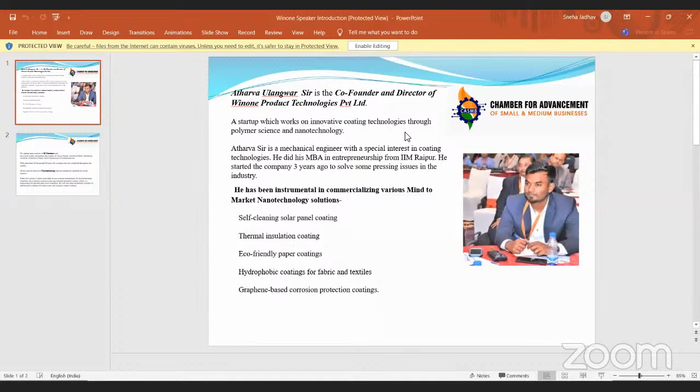Thank you, ma'am. Now I would like to introduce today's speaker, Mr. Atharva sir, who is the co-founder and director of Winone Product Technologies Private Limited, a startup which works on innovative coating technologies through polymer science and nanotechnology. Sir is a mechanical engineer with a special interest in coating technology. He did his MBA in entrepreneurship from IIM Raipur.

He started the company 3 years ago. He has been instrumental in commercializing various mind-to-market nanotechnology solutions like self-cleaning solar panel coating, thermal insulation coating, eco-friendly paper coatings, hydrophobic coatings for fabric and textiles, and graphene-based corrosion protection coatings.

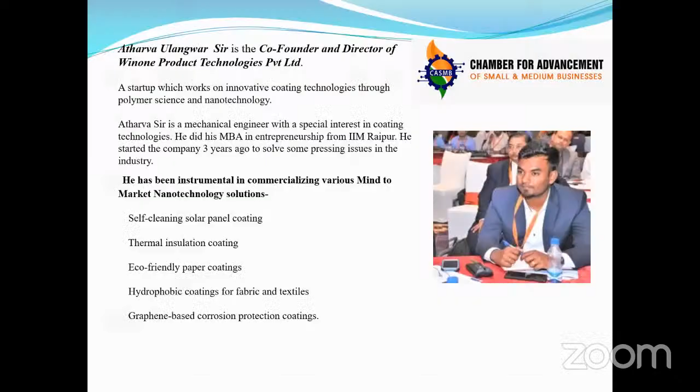His startup team consists of 35 members and have done projects throughout the country in power plants, chemical plants, refineries, fertilizer and irrigation projects, and commercial civil industries. With more than 50 successful projects, his company has set a foothold throughout the country.

He has a special interest in nanotechnology and its commercial applications in industry. Today he is going to shed some light on new coating technologies for the food processing industry. He will discuss a new age thermal insulation coating, which is a replacement for age-old glass wool insulation, and share technology insights on antibacterial coatings for clean rooms and hygiene control coatings.

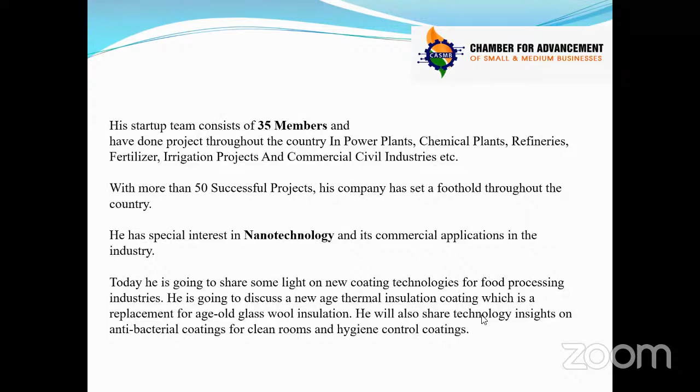Thank you, yeah, thank you, Hemlata, for the kind introduction. Hello everyone, a very good afternoon to everyone, and thank you all for joining today. So let me start with the presentation right away. I hope you're able to see the screen.

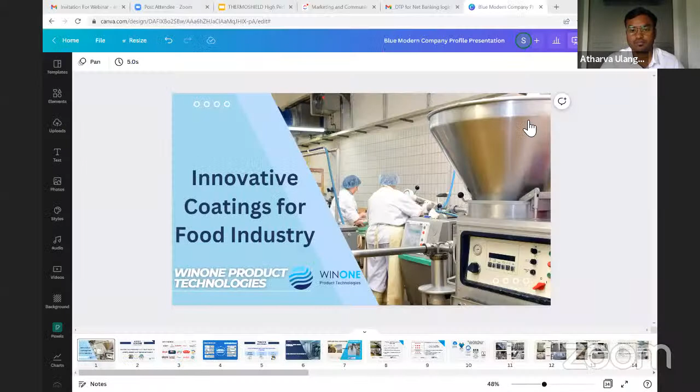So today we are going to speak about innovative coatings for the food industry. I believe all of us in a way are related to the food industry, as consumers or manufacturers or in some other way. I'm going to talk about innovative coatings for the food industry, their applications, and how these coatings help the manufacturing industry operate in a better way.

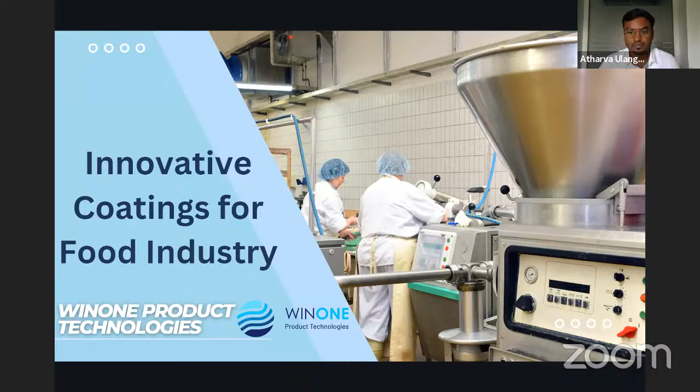Moving forward, just about my company - we are a startup based out of Pune, and we have been working for the last 3.5 years. We work only on coating technologies which help you save assets, energy, and environment. Assets, energy, and environment, that's our core offerings. Assets means we protect infrastructure like power plants, chemical plants, and everything. Then we work on energy - our coatings help save a lot of energy, which I'll talk about. And in general, there is an impact on the environment.

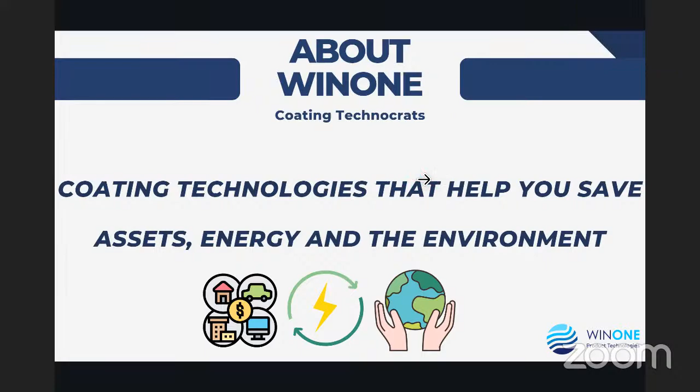We mainly work in irrigation, oil and gas, marine, pharmaceuticals, and all of that. This is what I've tried to highlight across new and old plants.

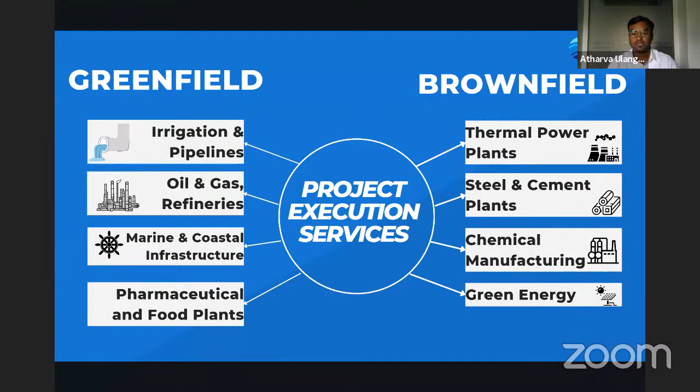Coming to today's webinar, I'm going to highlight two specific coating technologies - one for thermal insulation, and second for hygiene control through antibacterial or antimicrobial nanotechnology. Today's webinar will highlight how coatings can help you save and improve energy efficiency, hygiene control, and asset integrity. Energy efficiency and hygiene control are two very separate topics, so I will go through them one by one, but they are related through coating technologies.

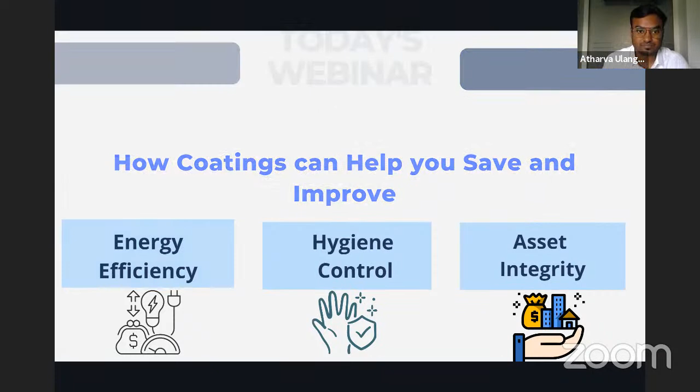First, starting with thermal insulation coatings. Wherever we see process industry throughout the country or the world, there is heating or cooling - either a process takes place by heating something, making steam, evaporating, or boiling something, or it is done by cooling or refrigerating something. When heat is moved to a point higher than ambient temperature, this heat has to be preserved, or this chilling has to be preserved. That's why insulation is used in most of these industries.

But there are a few conventional technologies in the market, and there are some drawbacks with that, which we'll look at. Conventional insulation consists of glass wool, rock wool, some kind of PUF insulation, covered with aluminum cladding. That has a lot of problems, though it's also actually a very good system - it's been used for so many years and is applicable in all industries, from refinery and power plants to food processing and pharma. But this system has a lot of inherent problems, which we'll discuss.

So what we're doing is converting this conventional insulation technology to a new technology through coatings. This whole system of PUF - the glass wool, rock wool PUF, and aluminum cladding - is being replaced just by the coating.

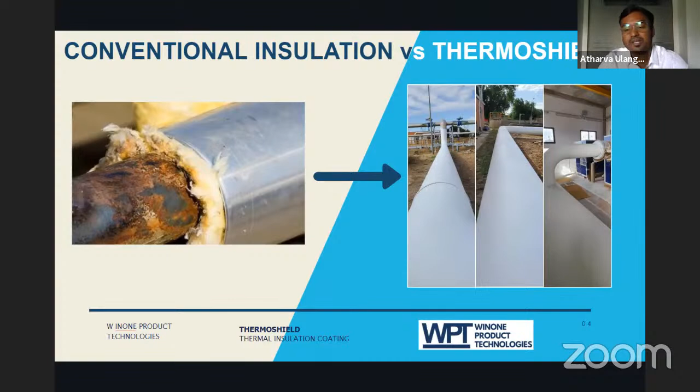So these are the problems with conventional insulation. The most major problem right now is corrosion under insulation. For example, if your pipeline is insulated and covered with aluminum cladding, you do not know what is happening under the insulation - corrosion must have eaten into the pipeline, leakage must be starting. As soon as liquid or process steam starts dropping from your cladding, that's when you know there is some damage below the insulation.

Corrosion under insulation is a very big problem in the country right now. I was reading a research paper where they estimated around 800 crores worth of loss to just the oil and gas industry because of corrosion under insulation.

The material used for insulation is also non-recyclable. If you accidentally touch it, it will start itching, or the small fibers will penetrate into your skin. Now imagine how the workers might be going through while installing this insulation.

This has been happening for many years. Also, this insulation is very difficult to install on complex structures, and because of this complexity, in a lot of places the insulation does not happen—like on valves, bends, and precious equipment like control valves. So these kinds of things are left open, and these are the points from where the heat loss happens.

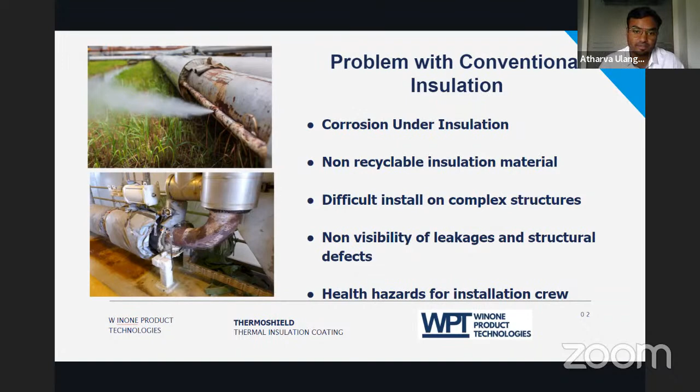We have developed a coating technology which is applied like a paint, but it acts like an insulation. We have integrated nanoparticles which act like an insulator on the nanoscale, dispersed into polymer to make a coating. So 60 mm glass wool can be replaced just by 3 mm of paint. Isn't that a very big revolution?

But it also has a lot of other advantages. If I apply a 2 mm coating, from 120 degrees we can bring down the surface temperature to 45 to 50 degrees. Also, if applied like paint, it also acts like an anti-corrosion paint. So the problem of corrosion under insulation is completely gone.

You can completely see the surface of the pipeline by visible eyes. You do not need to wait until the pipeline punctures. On top of all this, it is a water-based coating, meaning it's non-harming, does not have any solvent, and the best part is it's skin friendly.

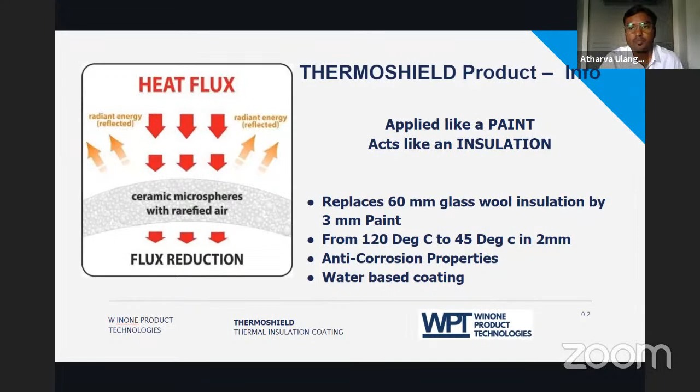So we are replacing something very conventional which was there in the market—glass wool, rock wool, or PUF or PU panel—with our coating.

So a few of the technology features, like I told you, it's water based with nanoparticles and completely free of any hazardous chemicals. And it works in two ways.

It works on the heat side also, it works on the cold side also. It will not let the heat escape the hot surface, and if there is cold inside, it will not let the cold escape the cold surface. So it's an insulation on both sides.

Since it is applied like a paint, the application speed is also very high. It can be applied with a brush or a spray gun.

Basically anyone can use it in-house. For example, if we just give the bucket, any painter can apply it. Actually, our application teams are also trained painters. So it's so easy to apply.

We work on polymer technology, so it has a life of 3 years in exposed environment, but if we apply a good amount of top coats on that, we can extend that life up to 10 years.

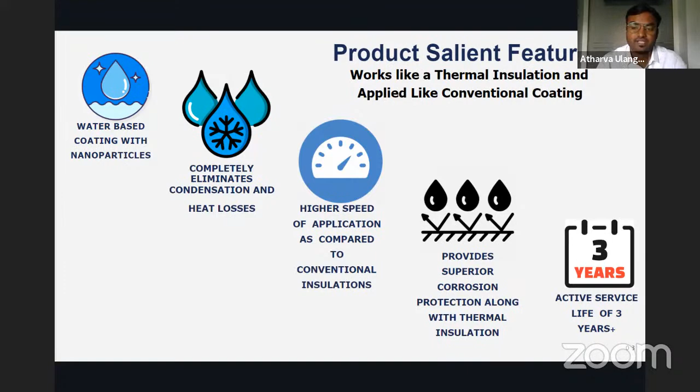I'm showing you some examples where we have applied this technology, mostly in pipelines. On my right side, this is a very complex network of valves and buffer vessels, with pipelines and small indicators, so it was very difficult for conventional insulation to happen here.

So this is where we applied our coating. In the bottom part, these are chiller pipelines—HVAC systems—and you can see the pipelines are placed so close to each other that it was impossible for conventional insulation to take place. This was actually a design error, but then to solve this problem, this coating came to help.

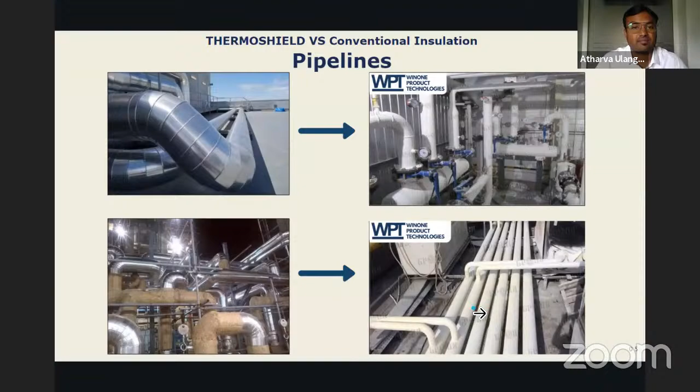This was a hot application, this was a cold application. These are some pictures of the pipeline application.

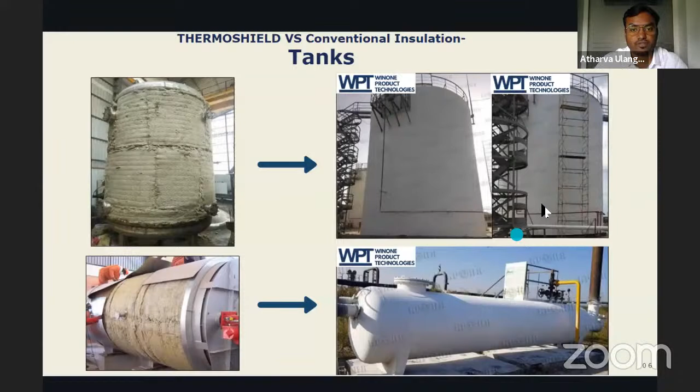We have also applied this on AC and HVAC ducts, where there was a limitation to the application of PUF panels or PU foam. This is also a very good application, and this coating can be sprayed at a very faster rate. So there's no need to wait for the ducts to get installed before applying it. These ducts can be coated on the ground and then installed.

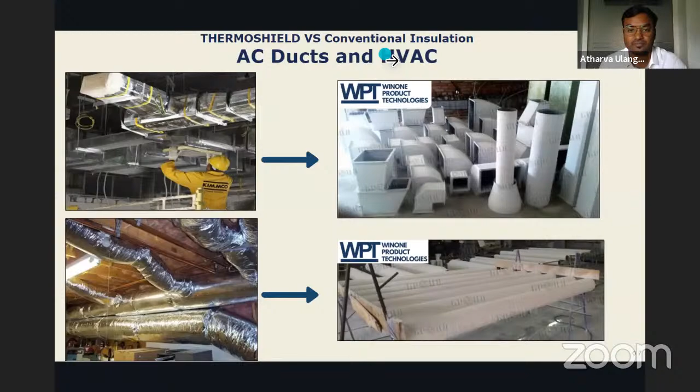With thermoshield, when we talk about the food industry, there is heating as well as cooling in the processes. In the dairy industry, there is a lot of cooling as well as heating in the same facility. In other kinds of food processing, mostly steam is involved. So it has applications in steam pipes, hot and cold water supply lines, ducting for ACs, and you can also insulate steel structures, roofs, internal walls and windows with this. That's a very good application. You can also insulate tanks and trailers like we talked about. It has a working range from 10 degrees to 120 degrees, so up to 120 degrees we can insulate and bring it down to ambient.

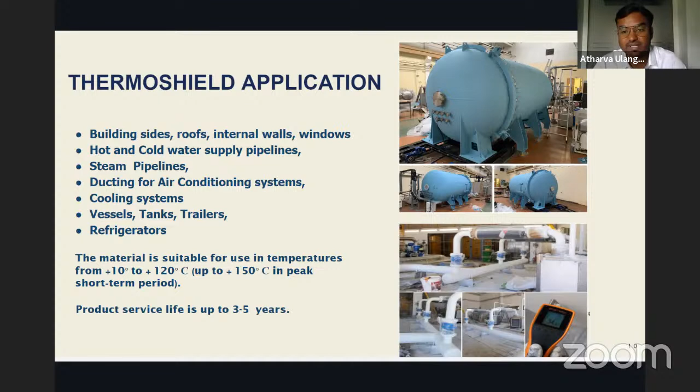I'm just showing you some case studies now. These are a few case studies from a mix of oil and gas, manufacturing, food, and power plants.

These are some vessels which we did for Finolex Industries, and you can see we got the 80 degree temperature down to 35 degrees. That's a 45 degree delta T with just 2 mm thickness. You see this is open to atmosphere, and if you notice, it would have been impossible to do conventional insulation with a vessel like this. If conventional insulation were to be done, these areas, like where my pointer is, would never be covered, as well as with these tanks.

We did multiple tanks there where conventional insulation was not possible. That's why for years these tanks were left open. With this insulation, now they can save almost 45 degrees of heat retained inside the vessels.

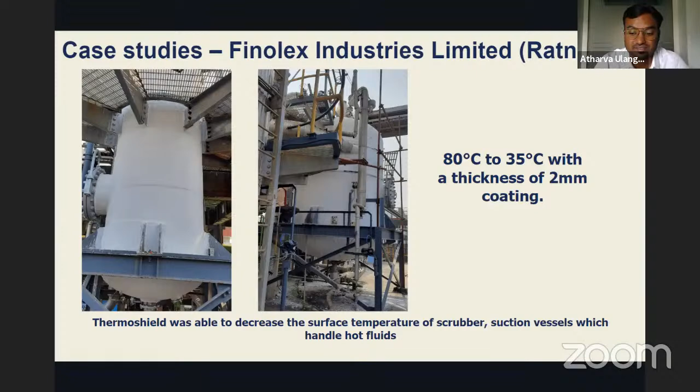This is a case study from Dynamix Dairy. This is a chilling plant - sorry, this is a hot application. This is a vessel which carries steam. Again, this insulation had gone to waste because of water ingress, and there was corrosion on the tanks. So we replaced that with an insulation coating, and this was done immediately within 1.5 days. They had a visit, so there was a very quick turnaround which we could achieve with this application - an 80 to 40 degree difference with a dry coat thickness of 2.5 mm. For the same application, they would have used a 60 to 70 mm thickness glass wool insulation with cladding and all the fittings.

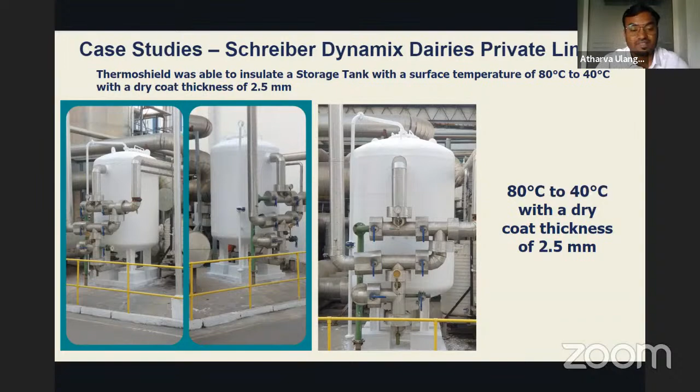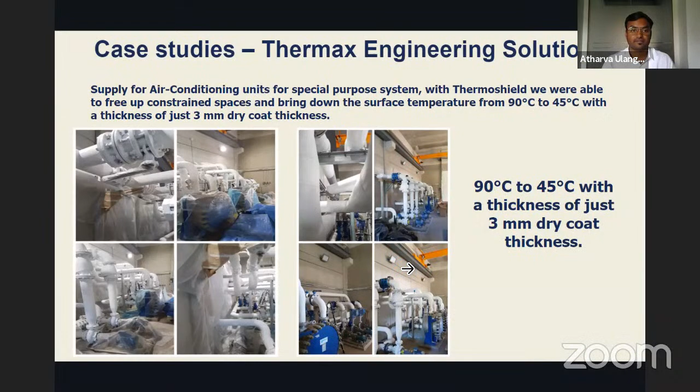A few case studies with Thermax Engineering - these are some of their field installations where an air conditioning unit and a heating unit were in combination. 90 degrees to 45 degrees, again a 45 degree difference, with a dry coat thickness of 3 mm. If you see the structure of these pipelines, it was impossible to do conventional insulation. The valves or bends would have been left open because proper workmanship never happens in a conventional insulation system. So this is a very good example where complex systems can be replaced in this way. This is again one application.

This is one very good application where we have the freedom to add any color in the coating, so the coating can be colored in any form. And if you see, this is done with a very good surface finish.

This was actually a reboiler, and it was exported to outside countries. So this was actually installed in the factory.

If this was conventional insulation, the tank would be sent there, then the insulation team would be sent separately, and the insulation material sent separately in a container. This team would go there, install on site, and come back to India. Instead of that, we have just coated this in the factory, and it will go as a ready-made piece to the end customer.

So this is the beauty of this product and how much cost and value it has saved for a lot of application.

So yes, before moving ahead, this was something on thermal insulation coating. We are continuously on the research where we are trying to reduce the thickness day by day, while maintaining the same temperature difference with the coating thickness. If you have any questions, we'll take it at the end because I have one more part to cover.

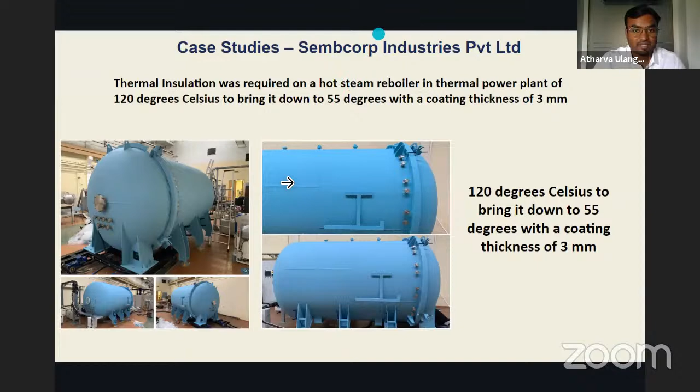So this is a technology which we are working on since last 3 years, and we have got very good response. Whatever application is there, we can develop it because we have our own research and development team.

So my aim with this technology is to eliminate glass wool and rock wool in the market, because there are a lot of drawbacks to that. It cannot be disposed of. The people who install it are having cancer problems, and there are a lot of other related issues to that. So this is a very good water-based solution which can replace that age-old technology.

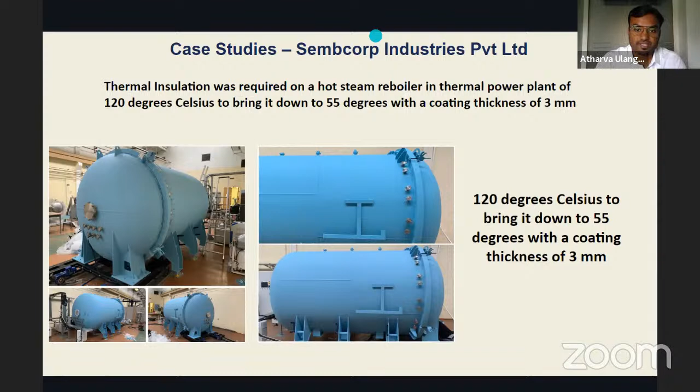So yes, moving forward, the second part of the webinar which I wanted to cover was antimicrobial coatings for hygiene control.

Friends, we realized the importance of hygiene control when COVID hit us. You were not able to touch any surfaces, or after touching or going out, you could come back and wash your hands. Then you started using sanitizers on a daily basis. Then mask was a very mandatory thing.

So why this came into picture after COVID, but this scenario was already present. These things were already happening in the food industry or the hospital industry, where sanitation or surface cleanliness is of very, very high importance. So what happened during COVID is we started working on these technologies, and what was developed during COVID got applied to other industries as well. So what we developed for common public was also available for the industries to adopt.

So let's get into this. What is antimicrobial technology? When we say antimicrobial, the basic and most common examples of antimicrobial technology is your Dettol, or the soap which you use, or the sanitizers which you use. So they are all antibacterial, or the Lysol also which you use.

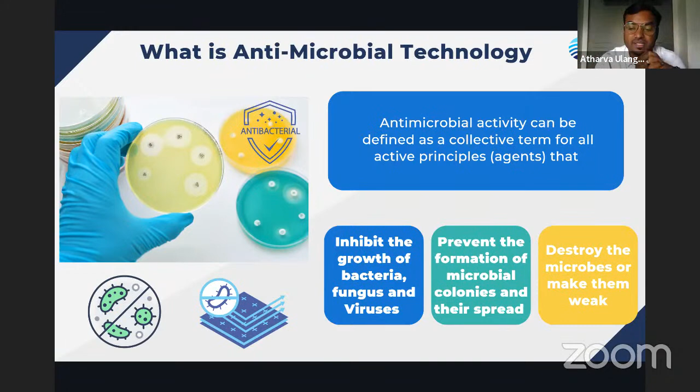So I'm just showing you a video of how antibacterial technology works. What we have done is we have worked on a lot of nanoparticles which go into these coatings, and they act at a nanoscale. Nano means 10⁻⁹, so if you divide 1 meter by 100 crore, you will get 1 nanometer. So we started working on particles which are in the 5 to 10 nanometer size range.

And what we did, we included that in the coatings or polymers, and it did miracles. So you can say we developed coatings which can destroy virus, bacteria, as well as fungus from the surface permanently. Now how this works, we have demonstrated in a very simple graphical video. Please pay attention and see how it works. Maybe I'll also explain something in the middle.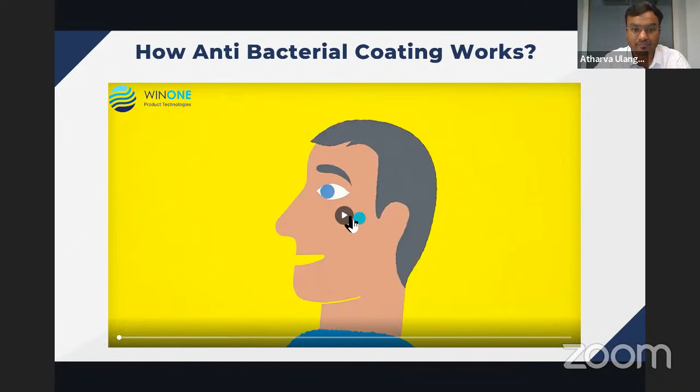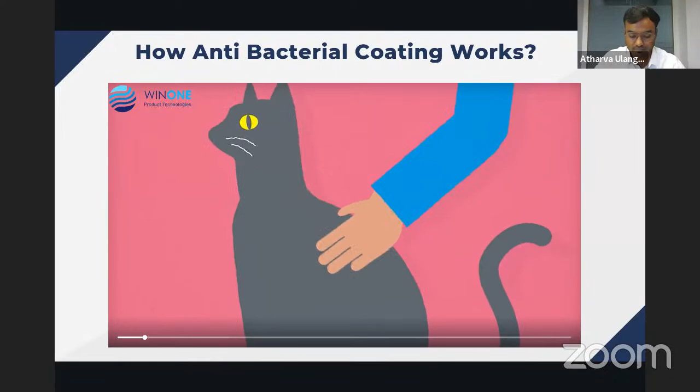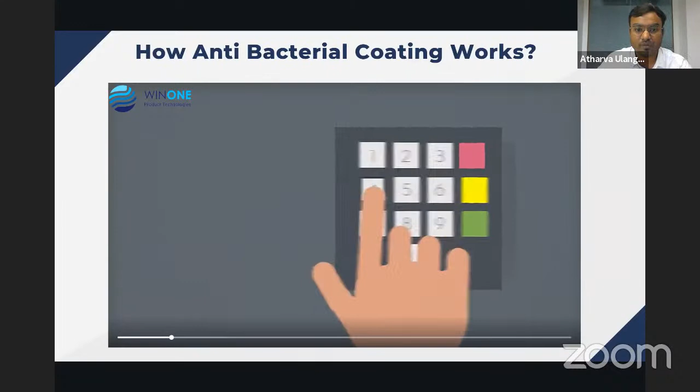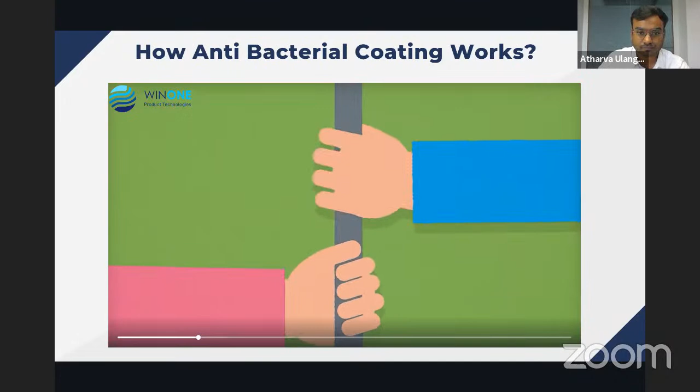You see, like this person is touching everywhere. He sneezed first, that's where the bacteria is in his hands. Now he's touching it everywhere - from the lips to the pets to the mobiles, then your chair, your carts, everywhere. So all the common touch areas, this person is touching it everywhere. So this is the bacteria or the fungus or the virus, it can be anything.

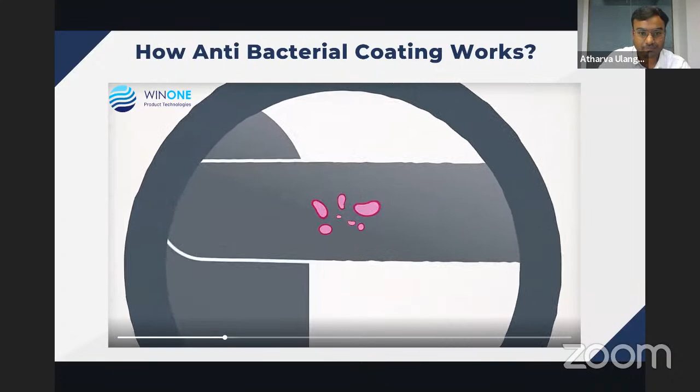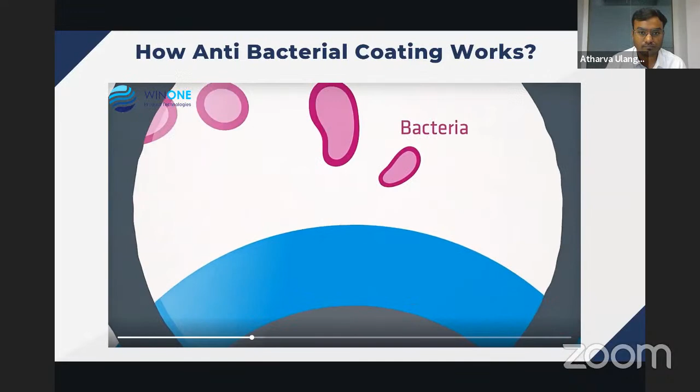So this is the bacteria. Now what happens when this bacteria comes into contact with the nano coating? So here Ag means silver. We developed the coating based on silver and a lot of other technologies.

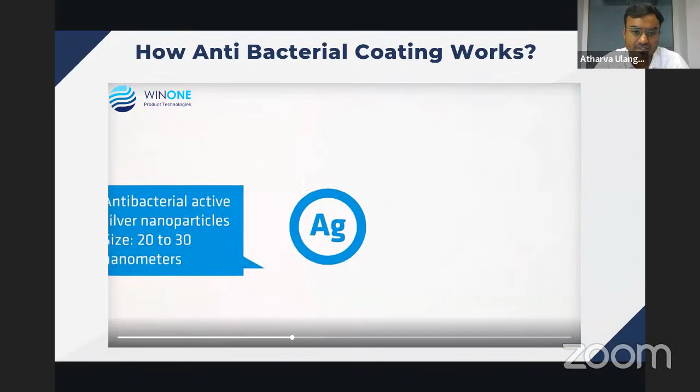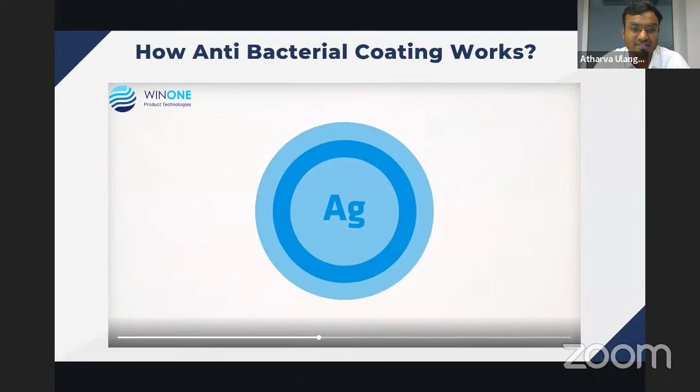So silver is antibacterial in property. Like you must have seen, in childhood we used to have chandi ke chamche se khana khate. So that was because of this, because inherently silver has antibacterial properties.

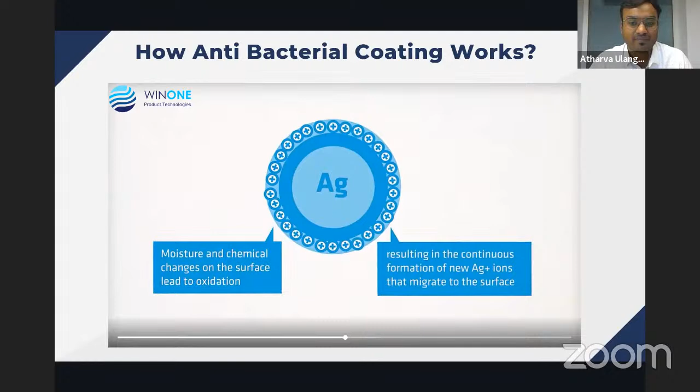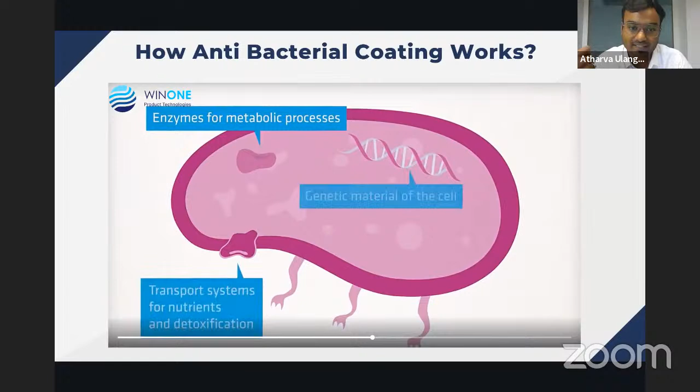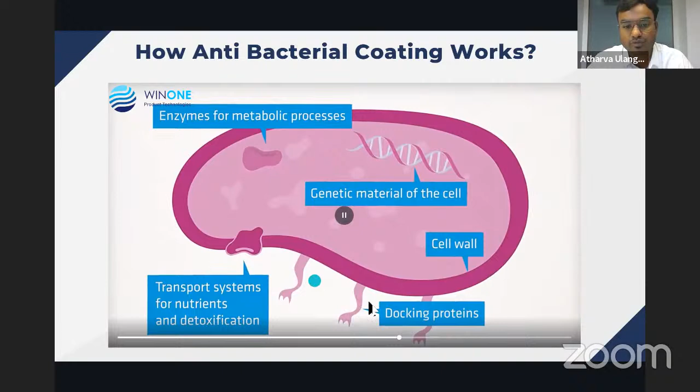So silver has a positive charge - this is the silver Ag plus ion. So this positive charge migrates to the surface, and what happens is these positive charge particles go and attack the bacteria. If you see the structure of the bacteria, it has a cell body, it has a mouth you can say, and this is kind of legs used for attaching to any surface. And this is the DNA.

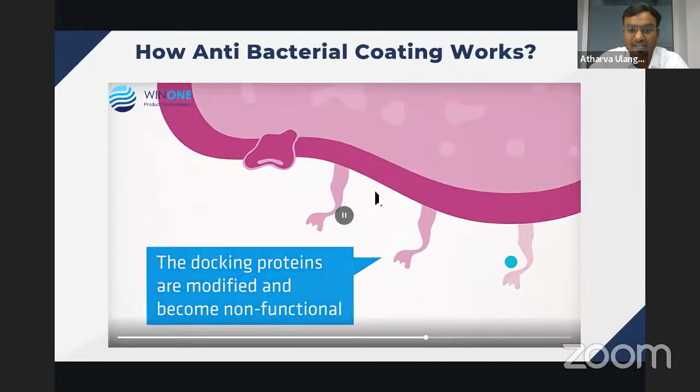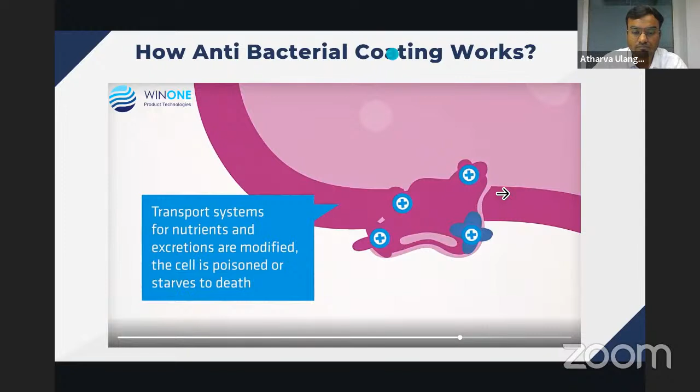The silver particle goes and destroys these legs, which are used to attach to any surface. Then this is kind of a mouth for the bacteria, where the nutrients go in, nutrients come out. So you see, like this is the stomach of the bacteria, which digests - the metabolic process. So the positive ion goes and destroys that.

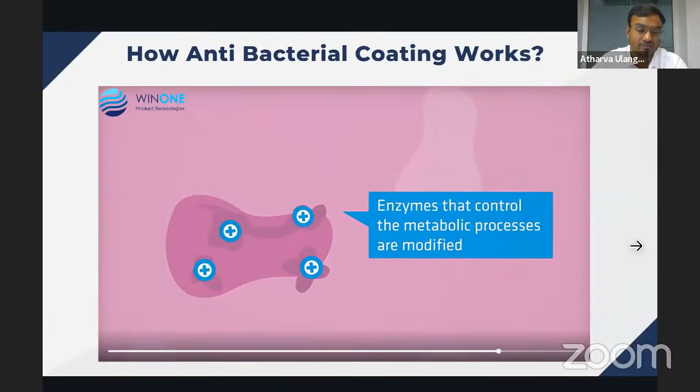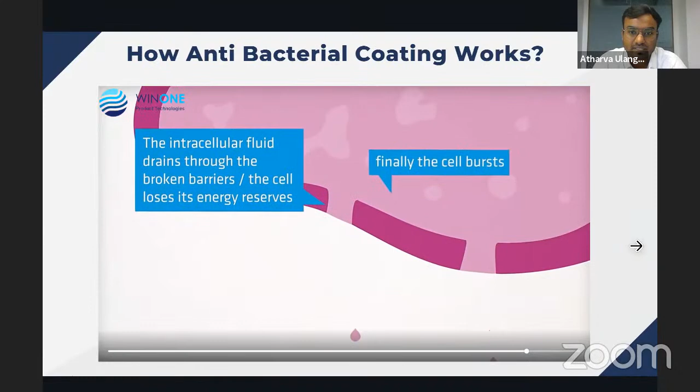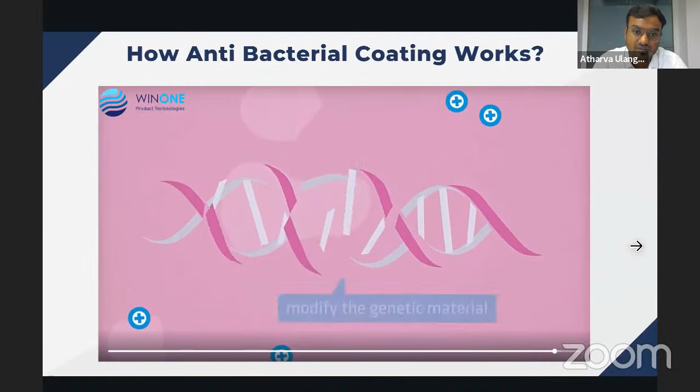Then what happens is this positive ion destroys the bacteria completely. And then this goes and attacks the DNA of the bacteria. Once the DNA is broken, the bacteria cannot reproduce nor can it repair itself.

So I hope it was self-explanatory. So this was how silver ion works. Silver is Ag, so Ag has a positive charge. So the positive charge goes and destroys the bacteria one by one - first it attacks the legs, then it attacks the skin, then it attacks the heart, and then it attacks the DNA. So this is how the coating is done - these Ag particles create a layer on the surface.

I'm now going to show you some real life examples of some microscopic images. So you see, I'm pausing this video. Let's concentrate on this video first.

So left side has antibacterial spray. So this is, you can say, E. coli - a kind of bacteria or microbe. This E. coli, you can see, is sprayed with the antibacterial coating, and this is unsprayed. Now you see the difference - left side is treated, right side is untreated.

You see on the left side, the E. coli starts getting damaged - the cell is getting burst and they are getting... And on the right side, you see they are growing in size.

So this video is over a period of 1 hour. You see at the end of 1 hour, here the whole bacteria is gone, you can say vanished completely, or got killed - almost 99.99%. That's what they call, that's what they say in the Lysol video also. So that's true because there's a scientific method to calculate that. So 99.99% gets killed, and here you see it has tripled in size.

We'll see this video again - concentrate on the left side compared to the right side.

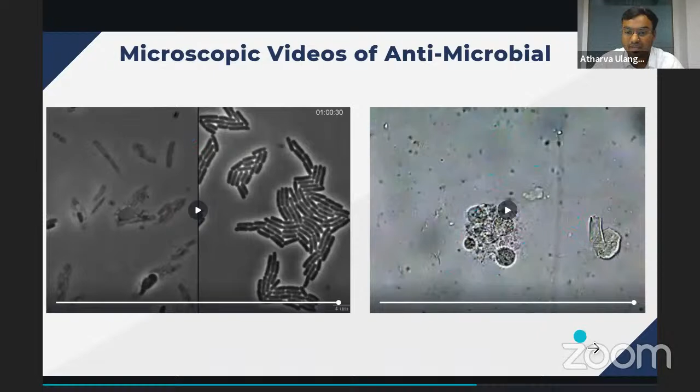So you see, within a period of 1 hour, you saw on the left side, and this is within a period of seconds, how nanotechnology kills bacteria absolutely.

Okay, so now coming to food processing plants, how all of this is relevant in food processing plants. Food processing plants have all the conditions for bacteria, fungus to grow. It has moisture, water vapor, and food, which is actually residual from the cleaning of the facilities, and then temperature as well. So the problem for food processing plants is the continuous presence of moisture and vapor.

Food processing plants which are regulated have high standards of cleanliness. For example, there's a morning shift and then an evening shift, so between both shifts there has to be a very thorough cleaning process. The vessels are clean, the line is clean, the floors are also clean. So a lot of high standards of cleanliness are there.

Then mold and fungus growth. We have seen because of moisture and continuous vapor presence, the mold and fungus growth is very huge in non-accessible areas. So whatever gets cleaned is okay, but the roof surfaces, the corners, or the area beneath the structures or beneath the machines, they are very bad.

What happens because of this is contamination of food products. These things get into your food, and I don't know how much of this is regulated in India, but it also reaches our packed food products sometimes.

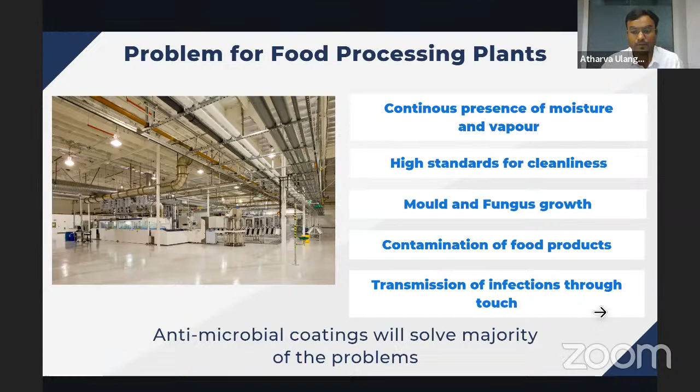So how an antimicrobial coating is made is a very simple representation. There are two components to it: nanoparticles and polymer. When we combine both, we get an antibacterial coating. Now, it's not as easy as it sounds. There are more than 10,000 types of nanoparticles, and every nanoparticle has a different functionality and a different action mode.

So silver will release positive ions, some form of ammonia will go and form a carbon chain. A lot of different action happens because it's at nanoscale. There's a combination of nanoparticles which can range from silver, copper, zinc, and a lot of other combinations. Then there is polymer, which can range from water to epoxies, PUs, anything. When we combine both, we have to check the stability of these nanoparticles in the polymer.

So nanoparticles are something like magnets, they'll go and combine and form a bigger particle. So how to keep them separate and keep them in nanoparticle form while dispersed into the polymer - this is how antimicrobial coatings are made, and it's a very complex process. We use a lot of other nanoparticle technologies, but mainly silver.

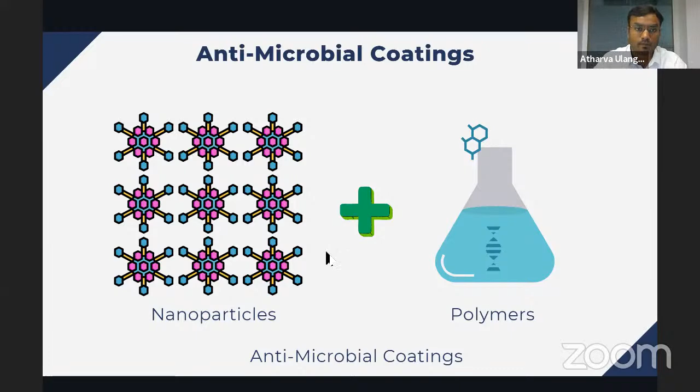So what can be done with these coatings? We created 3 different applications for antimicrobial coatings. First, wall paints - we created 2 technologies here. One is we can make any water-based paint antimicrobial by just adding an additive into it. The second is we also make ready-made paint which has the antimicrobial additives developed into it.

Then floor coating, which is very relevant to the food industry, process industry, automobile, or manufacturing industry - you do not see these floor coatings in day-to-day applications. Floor coatings can also be infused with nanoparticles which kill those bacteria continuously. And then the simplest mode for everyday or all-time use is surface coatings.

So we made a water-based coating which can be used like a sanitizer, and it can give these nanoparticles adhesion on your skin as well as glass, metal, wood, anything. So these are the three applications which can be done in microbial coatings.

Now, the beauty about nanotechnology is these particles can also be put into polymers, plastics, wood, in any form. For example, your phone cover can also be made antimicrobial if the nanoparticles are put in during the manufacturing stage. But right now we'll stay focused on the coatings.

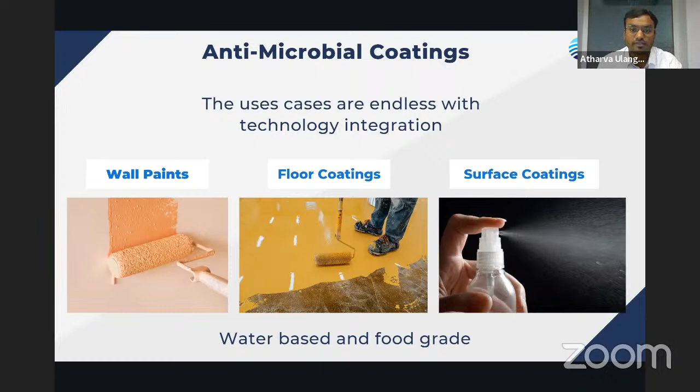So wall coatings have very good application in the food industry or clean room area applications, where you do not want any transmission of bacteria, fungus or virus through the walls. For example, if I touch this wall and my hand is infected, the bacteria on my hand will get transmitted to the wall, and those bacteria will immediately die within a period of 15 to 30 minutes. So there is an intensity at which the nanoparticles kill the bacteria.

Now, in clean room applications, we need a very clean environment where the movement of air is also monitored with filters. So this has application in the food industry as well as in our day-to-day home application. If your houses are painted with this kind of nanotechnology walls, you will never have any odor problems in the house, because the odor immediately gets disintegrated by the nanoparticles.

And one more beauty is that it is a water-based formulation, it is eco-friendly, and it is food contact safe. It is so safe that you can serve food on the wall and eat it directly. It is so safe, okay.

And one more advantage of this is the antimicrobial activity will last for the life of the coating. Until and unless the paint is there on the surface, it will keep killing the bacteria. So this is how, with the help of nanotechnology, we made a simple wall coating live, or gave life to the simple paint. This is the antimicrobial application in wall coating.

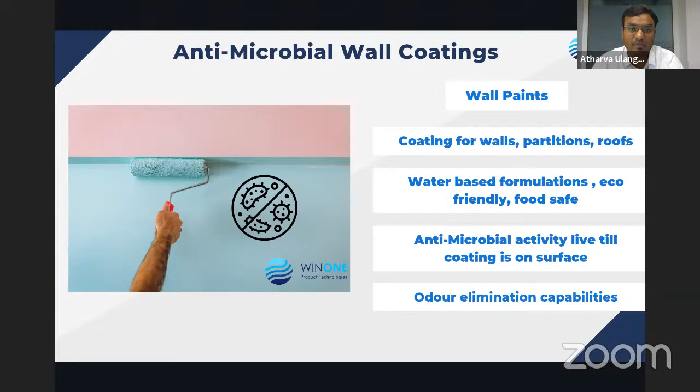Similarly, these antibacterial properties can be given to floor coatings. These are applications for the food industry, where you need jointless floors for easy cleaning, or curved corners, which are called the coving.

So we infuse these nanoparticles in the coating as well, giving lifetime antibacterial activity, anti-slip, and easy to clean and maintain. This can be done in existing facilities as well. So floor coatings are relevant only to the manufacturing industry.

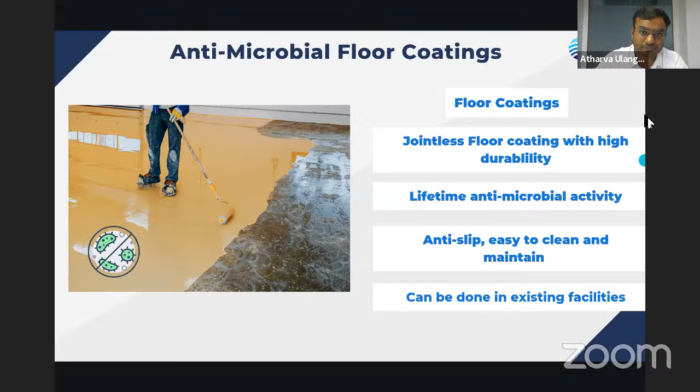Moving forward, this is something which can be used by everyone, which is a universal surface coating. So we have developed a water-based coating, which basically looks like water and has nanoparticles inside it. It can be sprayed on any surface, metal, wood, even your skin can be used like a sanitizer as well. This coating is active between 1 to 3 months.

Once sprayed on the surface, it's just like a sanitizer. It will stay active until the silver particles or the nanoparticles get consumed. Once it gets consumed, you can spray it again. It is as easy as spraying water on the surface.

And we are proud to say that this specific application is the most cost-effective antimicrobial coating in India, or you can say in the world, because we have made it so cheap and so affordable for everyone. And soon we are going to launch our own brand online where you can buy this coating.

Basically, you can spray it in your shoes, inside your helmets, or on your clothes, and these surfaces will never have any bacteria, and it will become odor-proof. This same coating can be used in industry for railings, door handles, trolleys, canteen areas, and common working spaces. This will avoid the transmission of bacteria or virus. COVID is gone, but people still have cough and cold nowadays during the summer and rainy season, so to stop that transmission, these solutions are very, very good.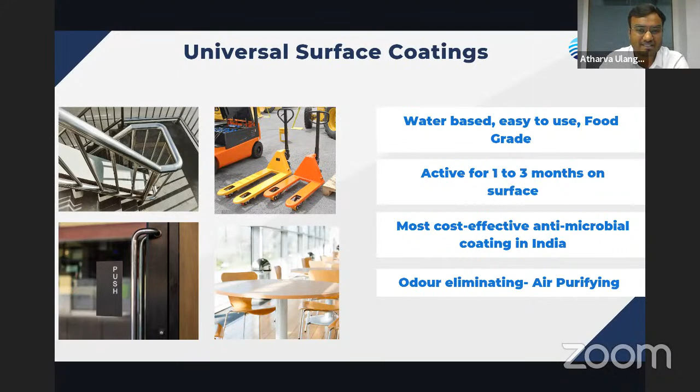Now hospitals, a lot of hospitals have started using the universal one. This coating is being used by hospitals, offices, and MNCs to spray on common areas like lifts, staircases, canteens, and workstations. So this is where these technologies have been put to use, and there's a whole lot of applications coming up nowadays.

These technologies were only accessible to industry until now, but with the help of our research and development as well as manufacturing capabilities, we are soon launching a spray which can be bought online, and you guys can use it in your day-to-day activities, like on your shoes, helmet, socks, or sports clothes.

What that will do is, firstly, it will kill the bacteria. Second, it will make that object odor free, so you will not have odor problems for 10 to 15 days. You can wear the same shoes or socks for a week without any bacterial infection issues. That's how we are doing it now.

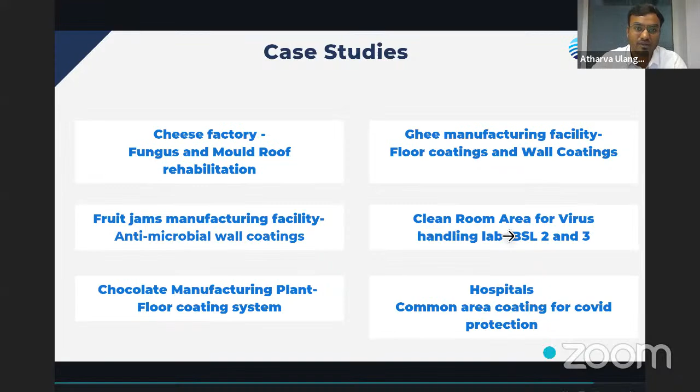So these were the two topics I had to discuss: first was thermal insulation, second was antibacterial technology.

Both are relevant to the food industry, and we are happy to give free of cost guidance to people who want to know how they can implement this. It's not that you need to get services or products from us, but we will help you in understanding the problem and give you a solution, purely out of interest to help the industry, nothing out of business interest.

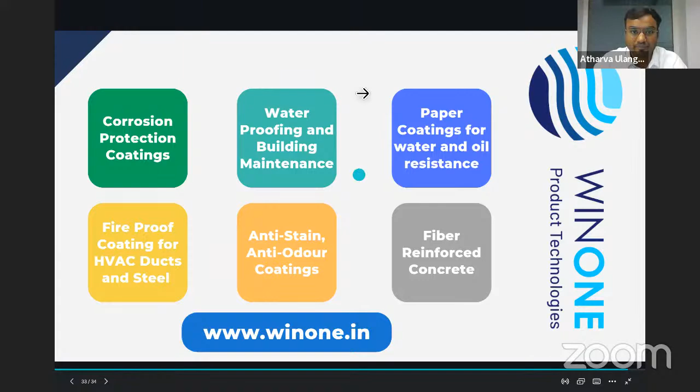So yeah, this is from me. This is basically our portfolio. We are a very young company, still a long way to go, but we are very happy to get in touch with people in the industry who need these solutions. Beyond any business interest, we are ready to help and partner with people who are ready to implement these new technologies in their facilities.